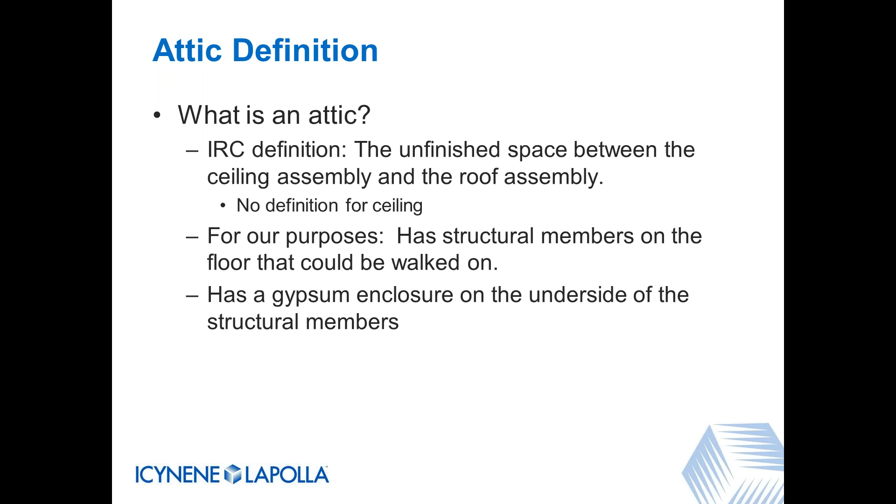But what we need to know for our purposes: an attic has structural members, the floor that could be walked on. That's important to remember. Structural members on the floor that could be walked on. And it has a gypsum enclosure on the underside of those structural members. So we need the gypsum board on the underside. And all of that is, quote, the ceiling that is created between the roof and the ceiling. And that ceiling is what we would need to have in order for it to be considered an attic.

And then to be even more clear, what is not an attic? The space between the roof and the occupied space that's separated by a drop ceiling. Those drop ceiling lay-in tile panels, sometimes they are gypsum board, but it's not a structural member, right? We don't walk on those. So that does not create an attic for our purposes. In fact, we have yet to find any building official anywhere that would consider the space between a drop ceiling and the roof an attic. So that's important to remember, that does not create an attic.

Space between the roof and occupied space used to convey conditioned air essentially creates a plenum. Now, a lot of times the just-talked-about category of a drop ceiling will have a plenum above it, and a lot of people will refer to every drop ceiling as having a plenum above it. But what's important for us to know as a foam plastic insulation industry is that an actual plenum that conveys air for the conditioning system comes with different requirements. So the generic term plenum gets thrown around; most people just use that as a definition for space.

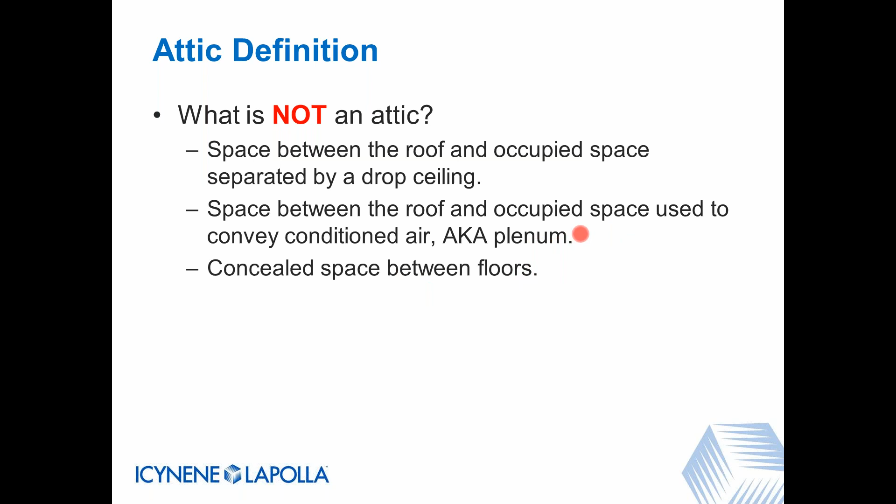But in reality, if it's not conveying air for the conditioning system, really what you have is called a concealed space. That is defined in the code. So for us, we need to make sure we know the difference. If someone's calling it a plenum, we need to ask the question, hey, is it conveying air for the conditioning system, or are you actually talking about a concealed space? There are different requirements for each of these. These are more generic. The plenums can get more complicated. So it's important that we understand the difference when we're talking about that.

Here's a little tidbit of information for you. The term thermal barrier only appears in section 316, which is the foam plastic section of the IRC. It's not elsewhere, other than a definition of thermal barrier at the beginning of the code. And there are a couple instances in the IRC where it refers to thermal barrier, but it's actually talking about insulation as a control layer. So the code will use the term thermal barrier, but it'll mean insulation layer. So thermal barrier is only referred to in the IRC when we talk about the 15-minute thermal barrier in the foam plastic section. In the building code, it appears multiple times, most of them references to the 15-minute thermal barrier. So it's just interesting that it doesn't appear as much in the IRC.

So where are thermal barriers required? I have here two excerpts from the code, one for the residential code and one for the commercial code. They're both very similarly worded, but there is a difference. Starting in the 2015 IRC, they have added a prescriptive 23/32 inch, for those of you good at math, that's just about 3/4 inch, wood structural panel as a prescriptive 15-minute thermal barrier. It's always been minimum 1/2 inch gypsum board, but they've added 3/4 inch wood structural panel. So that's new, in the 2015 code, yes.

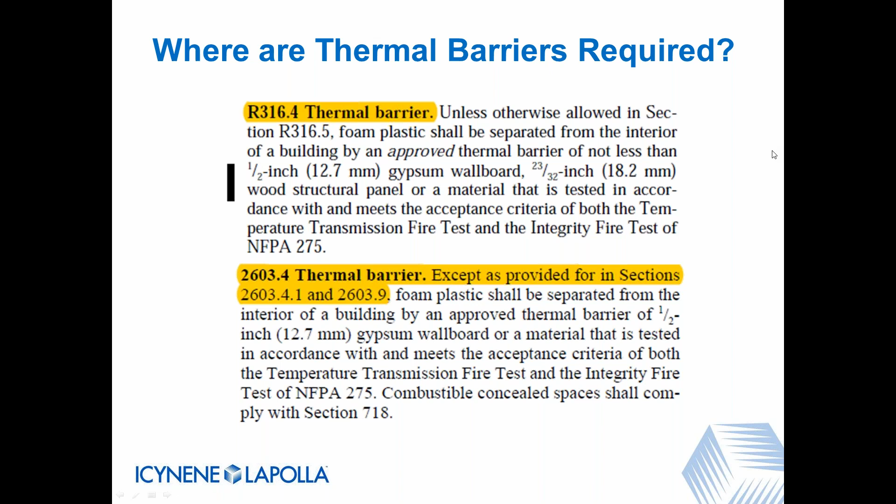attics and crawl spaces. The building code points out that it needs a 15-minute thermal barrier everywhere unless it's in an attic or a crawl space. And so in these locations, you only need a lesser quality ignition barrier. The ignition barrier is considered a lesser quality than the 15-minute thermal barrier. In both these attic and crawl space sections, they list prescriptive ignition barrier options.

But in the attic section specifically, and in the crawl space section, it's just not highlighted here, it specifically calls out unless you have testing in accordance with 316.6. So the prescriptive ignition barrier is not required if you test according to 316.6. So let's go over it one more time. Everywhere foam plastic is used, you need a 15-minute thermal barrier. Unless it's in an attic or crawl space, then you only need an ignition barrier. Unless you do testing according to this section.

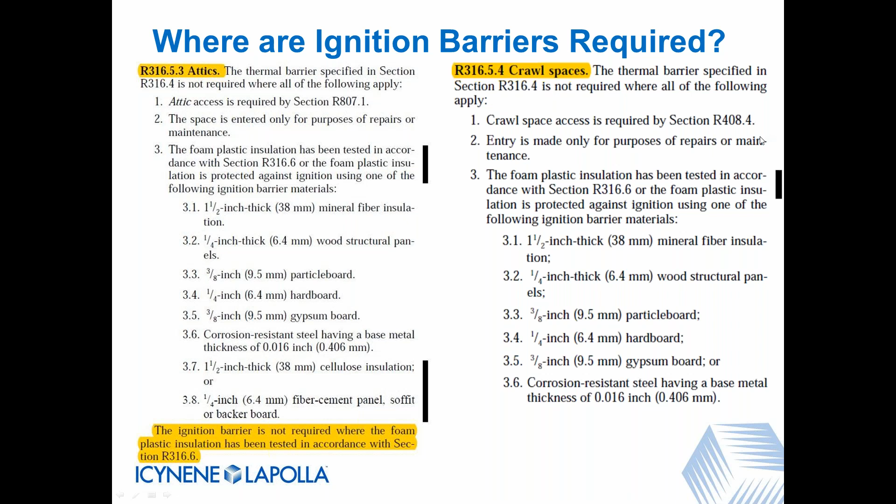So let's see what that section is. That is the specific approvals section. So foam plastic not meeting the requirements of the thermal barrier or ignition barrier sections can be allowed as long as you do testing listed here, right? And I have highlighted here, or fire tests related to actual end-use configurations. So this is where the IRC code specifically allows for end-use configuration testing to get around thermal barrier and ignition barrier testing.

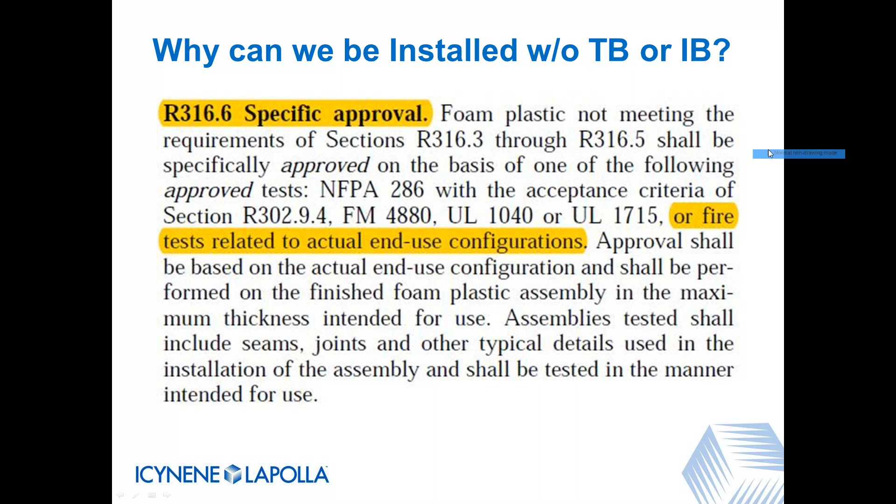Well, what are the other options? What are those tests? Are these ignition barrier tests? They were just listed in the code section. NFPA 286, that's common. UL 1715 and NFPA 286 are kind of cousins of each other. These two are similar, but different scale testing, not used as often. But according to these test standards, these are all interior finish thermal barrier tests. So none of these tests run according to the standard would give you an ignition barrier result. They give you thermal barrier results.

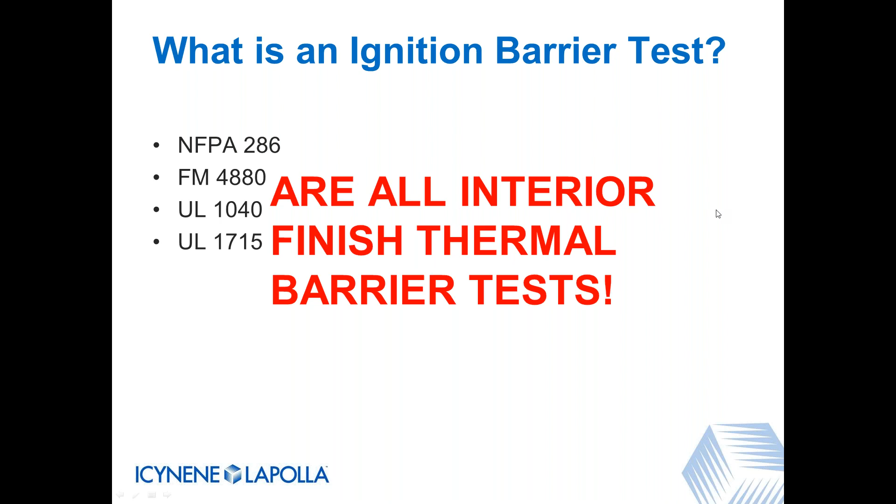So then how do we go around to try to find an ignition barrier test? Well, that is exactly what Appendix X is. Appendix X was developed by ICC ES. They're a subsidiary of ICC. ES stands for Evaluation Service. These guys developed an acceptance criteria, AC 377. And in this criteria, they have a test method called Appendix X. And essentially what they do is they alter the NFPA 286 test to account for the lesser quality ignition barrier.

And the word alter is subjective. Really what they do is they shorten the test. If the 286 test was 15 minutes long, the ignition barrier Appendix X version is less than 5 minutes long. It's actually 4 minutes and 18 seconds. It's not prescriptive in the code. It is created by ICC ES acceptance criteria. Appendix X is not referenced in the code. It's only given approval by the third-party services. Appendix X is a shortened, modified version of the 286.

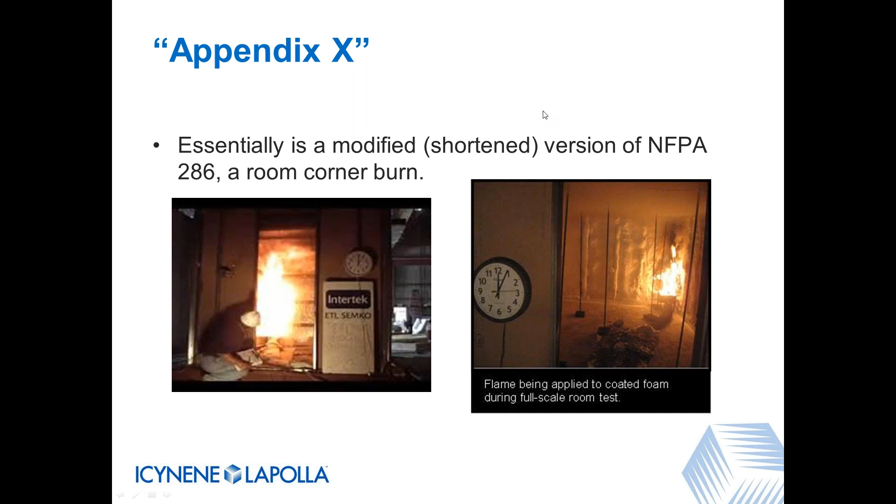So what is end-use configuration testing then? One of the things that we have done based on a lot of confusion in the industry is try to explain what end-use configuration testing is. And we've developed this trifold document that we find is very, very useful in helping people understand what the end-use configuration testing is, how it's different, and just as safe, and that there's nothing tricky about it. It's just different. That's all.

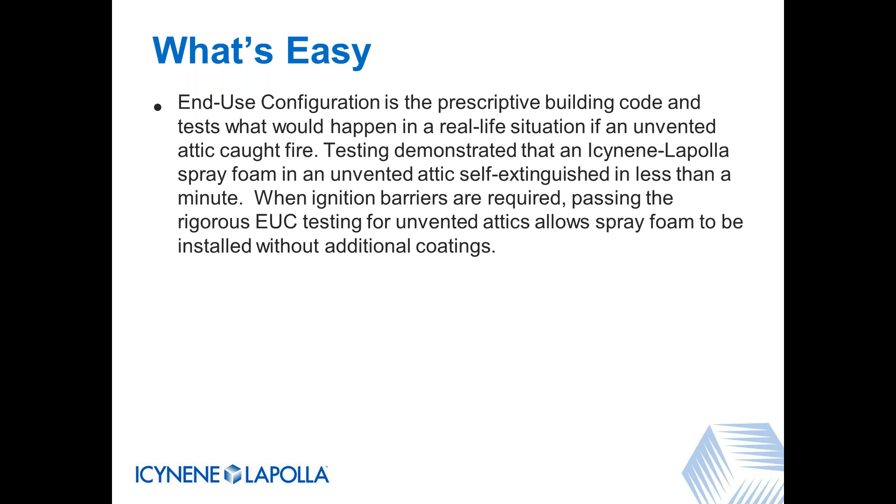So just like the Appendix X test, the foam catches fire. But ours, we show that it puts itself out. It self-extinguishes. So whereas in the Appendix X test at 4 minutes and 18 seconds, the fire may still be going. If it reaches the ceiling at 4 minutes and 19 seconds, you still pass because you didn't reach the ceiling at 4 minutes and 18 seconds. In our test, by 4 minutes, the fire would have been long out already. It would have put itself out. So that's a point that you want to make sure people understand.

So what's hard? Well, end-use configuration testing isn't the easiest, fastest, or cheapest path, but a majority of the spray foam industry has found it includes real-world construction considerations that Appendix X does not account for. We're talking about a number of things that are accounted for in the end-use configuration test that aren't even a blip on the screen in the Appendix X test.

And I think one more thing that's important to say is that it's not a one test and you're done application. This requires multiple tests for every manufacturer in order to prove out several different scenarios that the fire will put itself out. So whereas Appendix X is one test, if you fail, you can do it again, and if you pass, well, then you're good. Whereas our test, you've got to do multiple tests, and you have to pass them all. So it is not cheap, but it is certainly accounting for a lot of variables that help make it safe.

So why don't we compare the two here? Appendix X, again, each one of these slides that you're looking at is a section of this trifold. Appendix X is a non-prescriptive, modified NFPA 286 test, whereas end-use configuration is a prescriptive end-use configuration test. So the end-use configuration test is prescriptive. We showed you that it's called out in the code that end-use configuration can be used. Appendix X is not called out in the code.

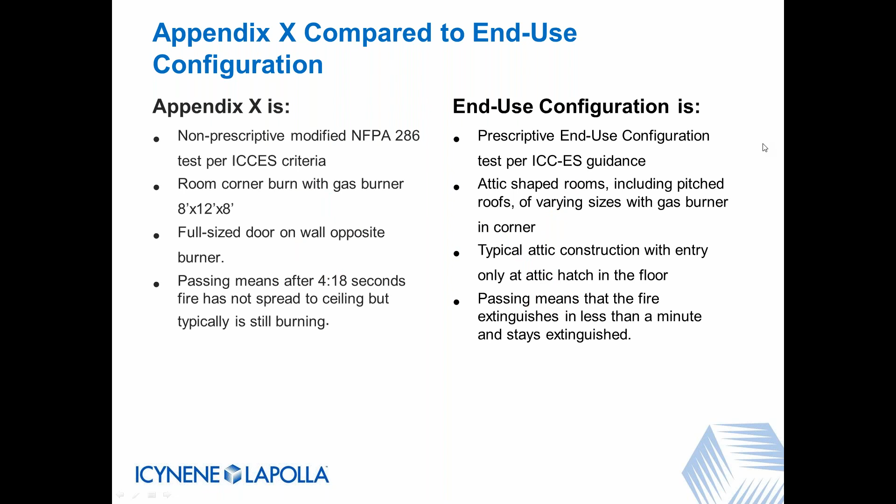So we also include these diagrams to give you an example. The end-use configuration test is built just like an attic. We've got walls, got a pitched roof. There's no door in the front. It's somewhat difficult to draw this to see through, but there is an intended door here, right, that you walk in. We've got wood joists on the ground. You've got a pull-down ladder that goes in. So this is just like attic conditions, and this is just a room with a big opening into it. There is no actual door. It's just a hole cut out.

And then just to be clear, this wall here where the opening is, there is no spray foam on this wall. So there's only spray foam on the side walls and back wall and the ceiling. Whereas in this room, there's spray foam everywhere, all 4 walls, the ceiling, exactly as it would be in an attic. And again, however you'd build an attic, that's how this room is built, with exposed wood materials. So this diagram is on the trifold.

There's a lot of information here, but this section is very important also. This is the misconceptions versus truth. So you as an installer of end-use configuration foam may have heard these before, and here is the truth about these misconceptions. It requires a "mysterious" or "magical" attic hatch, and they're in quotes because we have heard these words before. There is nothing confusing, mysterious, or magical about the hatch. It's simply an attic hatch that meets building code.

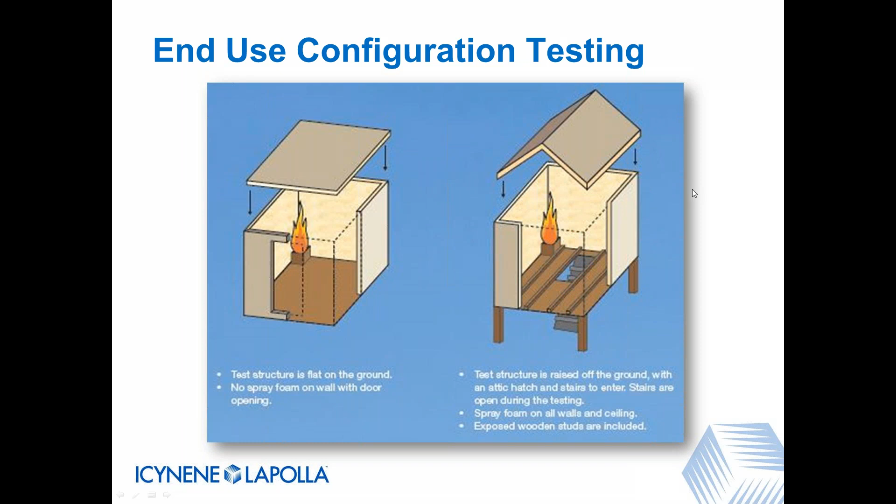So the thought of the pressure building and opening that hatch through pressure is fine, because in order to get approval for end-use configuration, you've passed with the attic hatch completely open. It just needs to have the ability to release the pressure. Okay.

Danger signage required. We've heard this before. There is no danger signage required to be left in the attic space, so this is absolutely not true. The Intertek CCRR reports require a notification that it is an unvented attic, but there is nothing about being dangerous. They just simply want a note to be left that it is an unvented attic. They just want people to be aware of that, partially because of this next one, that there can be no homeowner modifications.

Well, that's not true. You can modify things as you need to, as long as the attic is still unvented when you're done. If you have to cut a hole in your roof, maybe you had a crazy hailstorm and it busted through your wood sheathing, and you're going to patch it up from the outside, all you need to do is ensure that you've returned the attic to an unvented state. Then you're good to go. Okay, that's what's important to know.

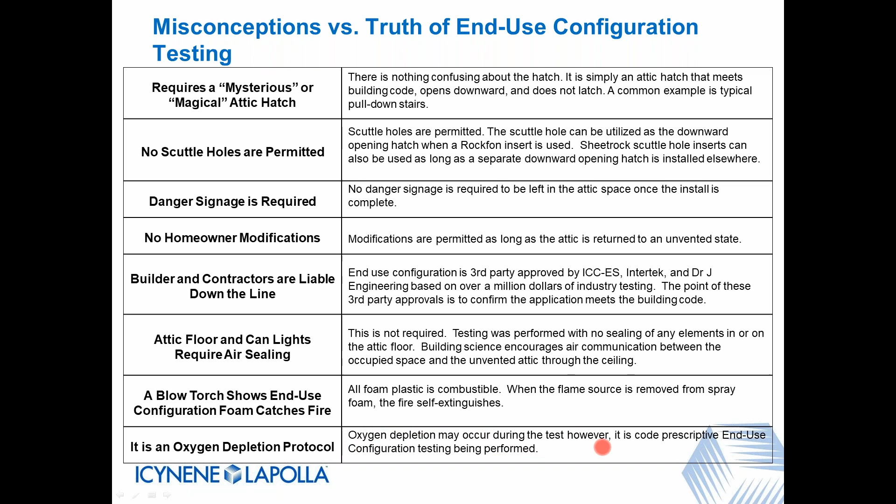All right. Now, this is a little bit more detail about the attic hatch. Whoops, didn't mean to do that. So let's just make sure we're all aware. Again, unlike Appendix X, the end-use configuration testing goes beyond just considering the fire itself. This is explaining why the downward hatch is necessary. I explained it earlier about the pressure that builds, but this is putting it in bullet points that someone can understand. End-use configuration testing accounts for the pressure and provides a way to release it if needed.

Building code requires attic access, so it made practical sense to use the attic hatch as part of the pressure relief configuration. It is actually our opinion that all unvented attics should have this pressure relief mechanism, that even Appendix X attics should have it. If they are truly unvented and a fire occurs, pressure will build. It's important that they also have the relief mechanism.

And again, it's nothing magical. Code compliant hatches that typically open downward with no latch. This will provide all you need right there. Code compliant, downward opening, no latch. We're good to go. Scuttle holes can be used based on the Rockfon Pacific 201 panel. We went over that. And again, even if the attic hatch is open or closed, the testing we have done shows that the fire will still go out. So the only real importance is that the attic hatch is not latchable, that it can open downward and allow for that pressure relief.

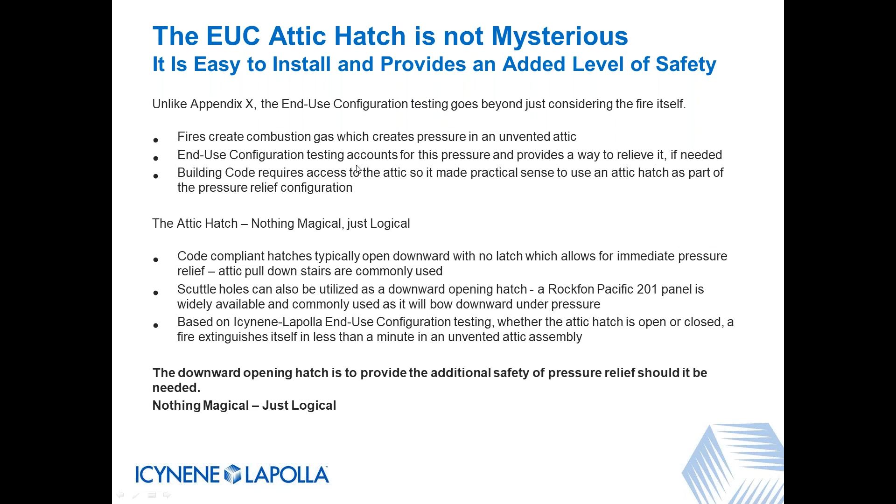What's interesting is that until end-use configuration testing came around and Appendix X was all there was, no one knew this. They didn't understand this concept. So it was the end-use configuration testing that brought this to light. And then in this document, we include a couple examples. So your typical downward opening hatch, stairs, it doesn't latch, spring-loaded type things, and a scuttle hole. This just needs to be a Rockfon panel, and if pressure builds, it'll bow in the middle and push itself downward through the hole. Nothing magical.

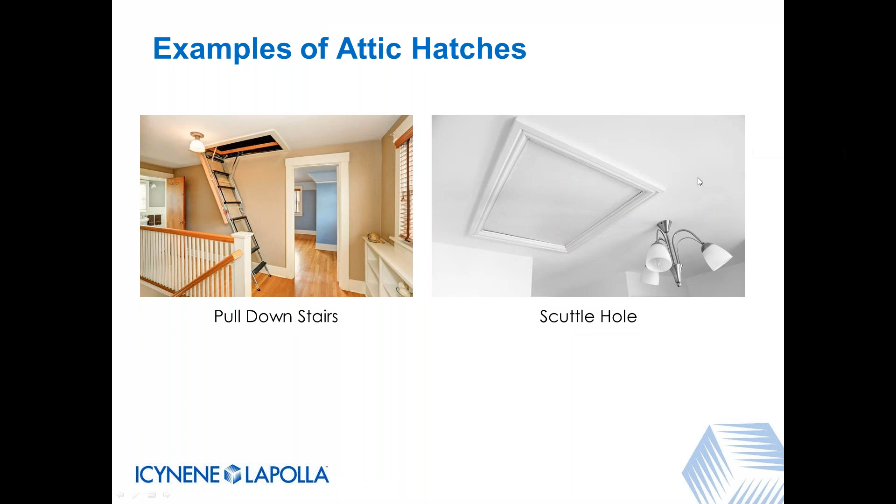And again, in this trifold, we very clearly point out where it calls out prescriptively end-use configuration testing. This is the same language that I showed you earlier. It's just typed out nice and neat with some highlighted colors. But this is where it calls out the fact that actual end-use configurations are prescriptive in the code, and they're mentioned both in the building code and the residential code. So it's there in both of them. So this is in the trifold.

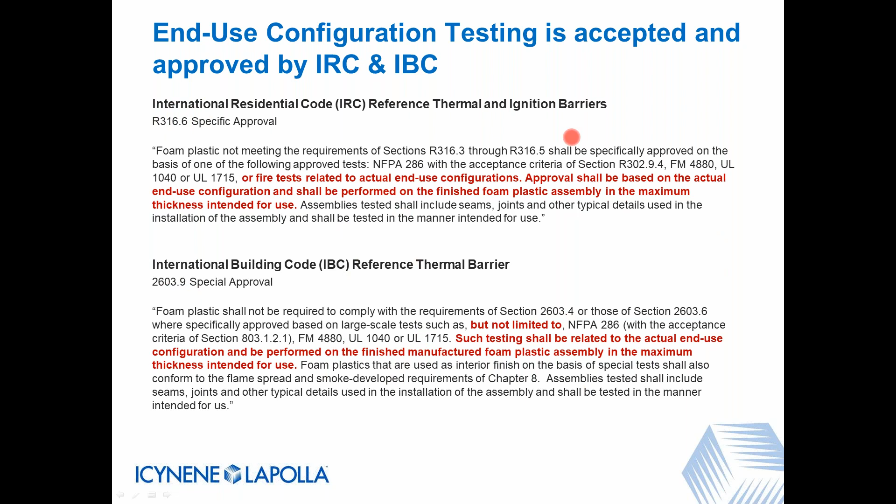So let's briefly go over third-party approvals here. The original process of testing was developed with Priest and Associates, and they created the engineering evaluation report based on all the testing done. And this report is what was submitted to the third-party approval companies. There's ICC-ES, there's DrJ, and Intertek. All three have approved end-use configuration. So that brings a lot of validity to what we're saying.

We used a third-party fire consultant to perform and analyze the testing. We used a third-party lab to actually do the testing. And then we submit it to a third-party certification body that reviews the testing and confirms it meets code. So anyone who says end-use configuration isn't safe really needs to go back to these third-party companies, and if they think it's not safe, then why did these highly recognized companies approve it?

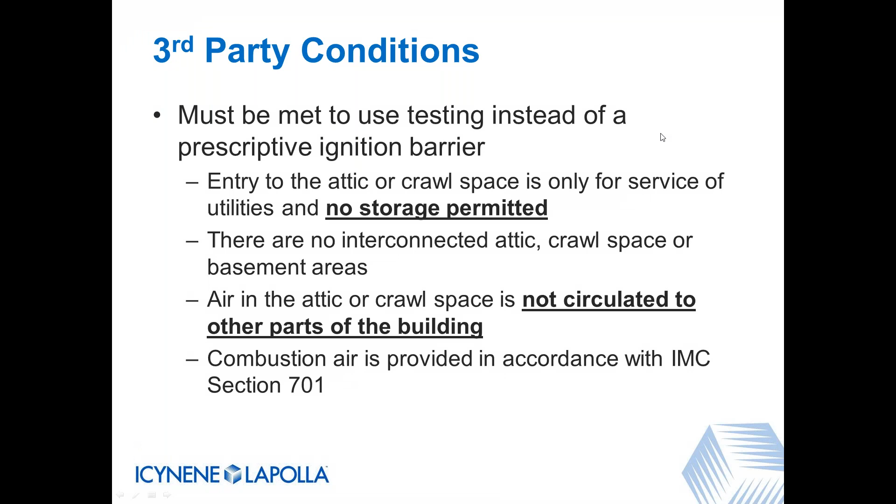Combustion air is provided in accordance with the mechanical code. So if you have mechanical equipment that requires air, it's not self-sealed, you may have to build a room around it in order to provide it the fresh air. Attic ventilation is provided where required, similar to that mechanical equipment. And underfloor crawl space ventilation is provided where required, again, for crawl spaces. But these restrictions don't really play much of a role in what we see.